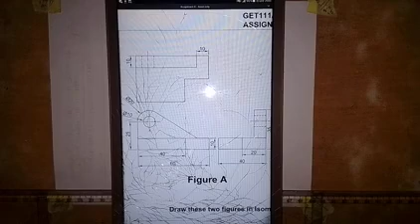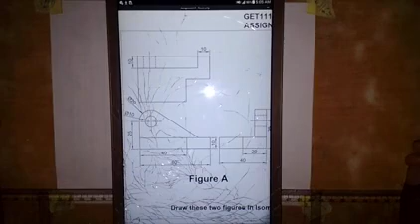We are going to produce its isometric view, as these views are orthographic views given in third angle projection. This is the plan or top view, this is the front elevation, and this is the right end elevation.

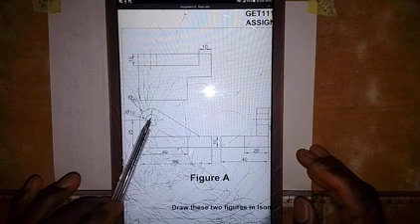Based on what we have here, the distance from here to here is 60 millimeters, from here to here is 40 millimeters, the thickness from here to here is 10, and the center distance of this circle from this base is 25. Diameter of the circle is 10, and diameter of this curve is 20.

With other things we have in the plan, on the end elevation we have distance from here to here to be 20, and distance from here to here is 20, which is also the same as distance from here to here. Then we have from here to here to be 10.

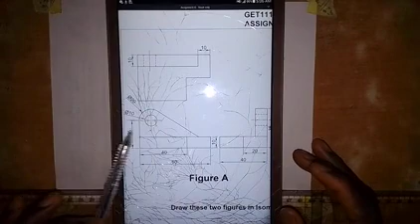As it is not indicated, the lowest point is not marked, but in my drawing I'm going to take this point as the lowest point, which is also this point here in the front elevation. We are going to use all these dimensions to produce the isometric view of this object, and the total height is 35 as shown in the right end elevation.

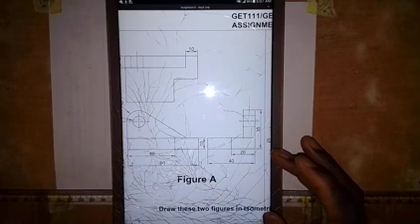Let's start and see how the work goes. The first thing we are going to do is make a short horizontal line here at this point, and then with the 30-degree set square, I will draw a line in this direction.

Sorry, I need to come up a little bit here, so I can't use that line. But looking at the dimensions we have, I'll show you how I'm going to do it. So we put the set square here, and we draw a line in this direction.

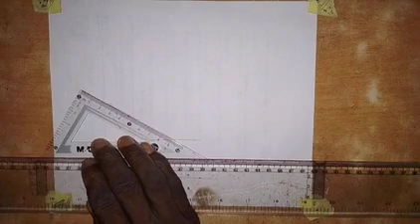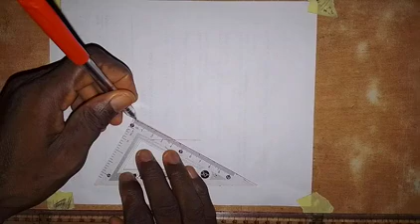I'm going to take a measurement of 40 millimeters on this line. Because I've said this point where we have that 40 millimeters, I'm going to take it as the lowest point. So at this point now I'm going to draw a vertical line.

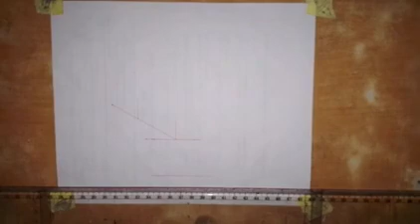I will draw a vertical line at this point here, and coming to this point also I will draw a vertical line here. Then the next thing is I'm going to draw a line at this point at angle 30 degrees to the horizontal, so it goes in this direction.

The measurement I'm expected to take in this direction is 20 millimeters. So at this point I will take 20 millimeters from this point to this side, so this is 20, and at this point also I'm going to draw a vertical line.

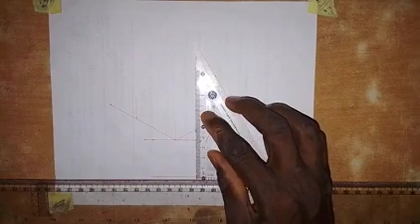So let's draw this line. Then I'm going to take a measurement of 10 millimeters on this line, 10 millimeters from this point up, so this is 10 as the thickness of the base part.

From this point I'm going to draw a line in this direction, then draw another line in this direction to touch this line, so we have this. Then from this point I'll draw a line in this direction, and from this point also I'm going to draw a line in this direction, so it goes like this.

From this point I'm going to take a measurement of 20 millimeters, so this is 20 millimeters here. At this point I'm going to draw a vertical line, so we have a vertical line here.

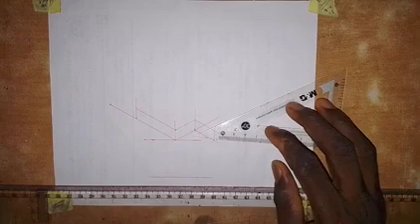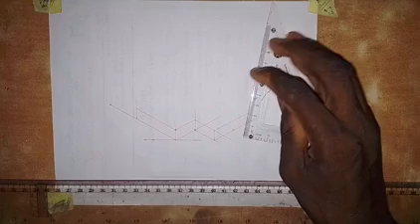Then from this point I'm going to draw a line in this direction like this, and from this point also I will draw a line in this direction. On this line I will take a measurement of 20 millimeters to this side, then from this point I will draw a vertical line here.

Then we come to this end here, so we are going to draw a line in this direction. The line is not really shown on this part, so we don't have to take the measurement.

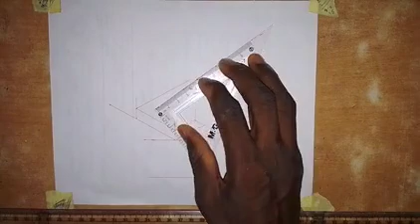So what I need to do is to transfer from this point to this end here. So from this point we take it to this end. So that is what we have as the base.

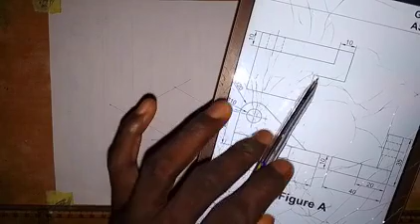Now based on what we have here, let me bring the diagram so that we can look at it together. Look at what we have here now. So what I've produced is this base part, and that is what we see here. So the next thing that we are going to do is that we have this part in the front elevation, placed here on this rectangle.

So we are going to form this part, and you are going to see how I am going to form it.

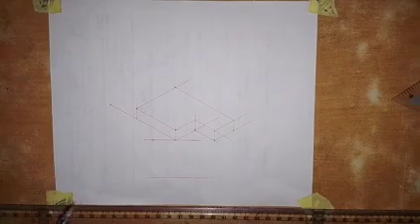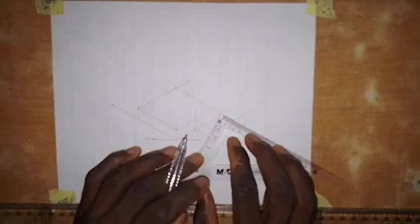So what I'm going to do right now is that the thickness of this part here is 10 millimeters as we have it here, and then we have to take a measurement of 10 millimeters from this point to this point. So from this end now, I will take 10 millimeters from this point to this point here.

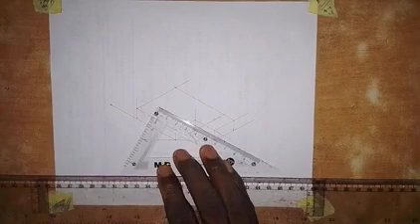Then I'm going to draw a line at this point. Then I will take a measurement of 10 millimeters here from this point, 10 millimeters in here. Then I will draw a line in this direction, touch this line. So that's what we have there.

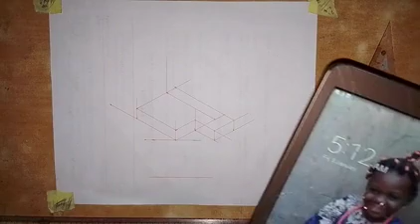So then at this point now, I'm going to erect a vertical line at this point here. So the radius of this curve here, or the diameter, is 20. So we are going to make a square on this face, whose length will be 20 millimeters.

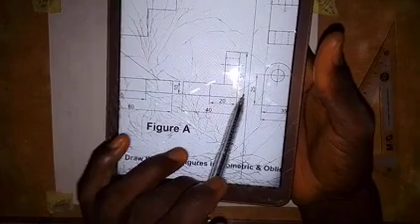But before that, the total height from this point here to this point is 35 millimeters, and already we have taken 10 from here to here, so that will remain 25. So we are going to take a measurement of 25 millimeters on this line, 25 millimeters from this point, up here.

Alright, so with this one, we are going to take a measurement of 20 millimeters here on this line. So this is 20 millimeters. So at this point, we are going to draw a vertical line at this point here.

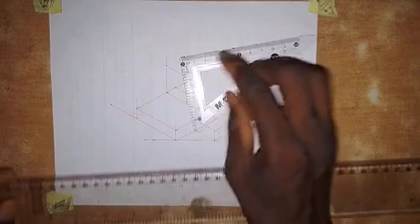And then this 25, we are going to transfer it onto this line here, like this. And then we are going to take a measurement of 20 millimeters down so that we can form the isometric square on this face.

So I will transfer this to this end here. So like this, we transfer it here.

Then the next thing I'm going to do is to locate the midpoint here, that is 10, 10 to both sides. So this is 10.

So I want to construct an isometric square on this face, and here also I will take 10 millimeters from either of the 2 points.

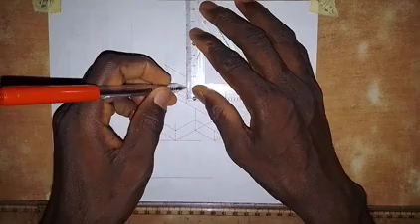At this point here, I'm going to draw a vertical line. So we draw a vertical line here. And also at this point, I'm going to draw a line at angle 30 degrees to the horizontal.

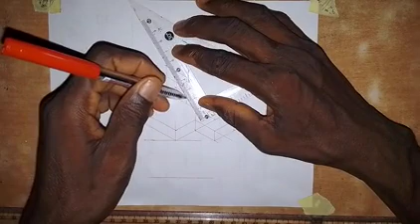So now with this, we are going to join this together. So we are constructing an isometric curve here, not a circle, though we are still going to draw a circle. Because it's very small, we are producing the arc here at this point.

So before that, I'm going to draw a line from this point and join it together with this point. So we join these 2 points together with a straight line like this. Alright, so that is all that I need on that part.

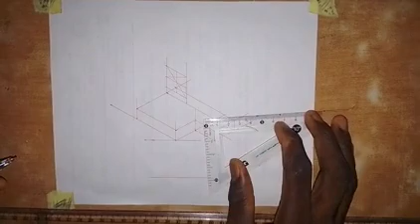So I'm going to take my compass, but I don't think the compass can work for this. So what I will just do, I will make use of a French curve to solve this problem. So I'm selecting the French curve that I will use.

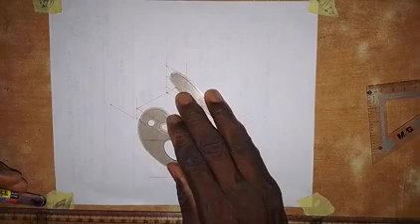Let me check this one. So we are joining this point here and this point together, and it goes like this.

So set the French curve very well, then we join these 2 points together like this.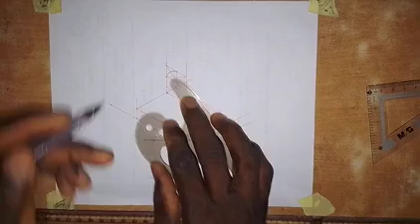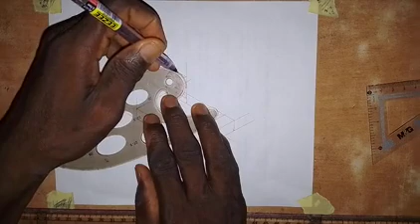And then for this part here, we are joining this point and this point together with the French curve again, so we set like this, and then we draw the curve like this. Alright, so we have this curve now on this face.

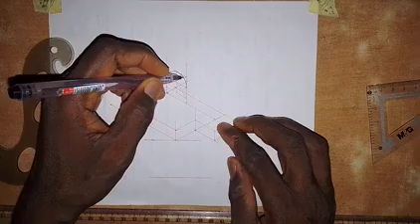So that is what we have there. I may still need to erase some part of this. I think I should have stopped it here on this line, but let's finish the work.

I will remove it. So then the next thing that we are going to do is to create an isometric circle on this face.

Okay, I want us to see it very well. So let's create an isometric circle on this face. The diameter is 10, so the radius is 5.

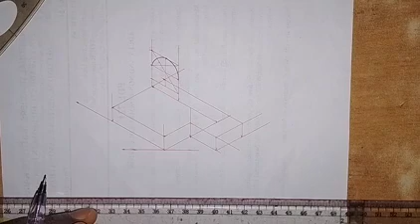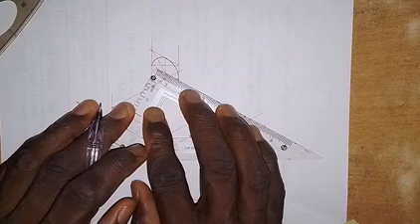We are going to take a measurement of 5 millimeters up and 5 millimeters down. So here we have the 5 millimeters, and down here we have 5 millimeters. On this side also we take 5 millimeters to the left side and 5 millimeters to the right side.

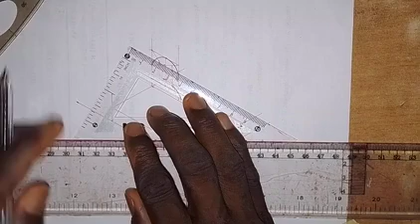Then we create the square on this face so that we can draw that isometric circle. We draw like this and draw a vertical line here. Then from this point, we draw a line in this direction, and we also draw a line from this point in this direction.

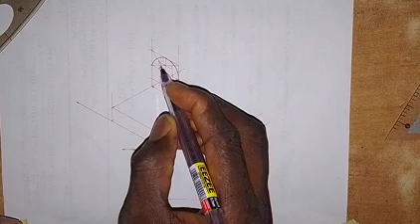You can see that this circle will be very small, so what I do in this case is use my hand to draw. I'm going to connect this point together with this, free-handed, and then connect this point together with this.

So we have it like this. Then these 2 points I will connect together, so it goes like this. When the circle is small, what I do is use my hand to join them. So then also this one, I will go this way, join this together like this. You can see the circle is shown here.

Alright, just try to make it bolder. That is how the circle will look there.

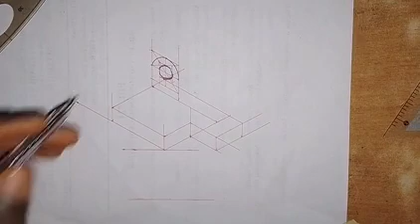So then the next thing we are going to do, we have the same thing on this side. We have this curve also on this side. So let's see how we can produce that.

What I will do is with the 30-degree set square, produce this point to this side, then coming to this point, take it to this side, and from this point, take this to this side here, and then from this point, take a line to this side, and coming to this point, produce the line to this side.

Then I will now take 10 millimeters from this point, and then from this point here, I will take 10 millimeters. And coming up here, I will take 10 millimeters from this point, and then here I will take 10 millimeters. So this is 10 millimeters.

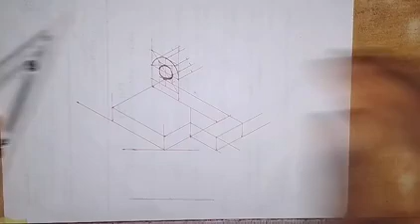So we have this. Alright, so this point we are going to join them together. I'm going to use the French curve to join this point together. Let's see if this will help us bring it out.

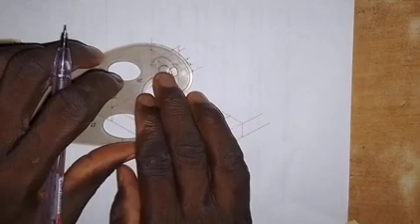Alright, so we set along this part, and then we are going to draw like this. So I still need to remove part of this curve.

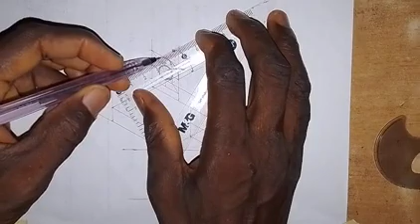And then for this part, so we join this together, and this line here now, this particular line will now be a thick line like this. Alright, so we are almost done.

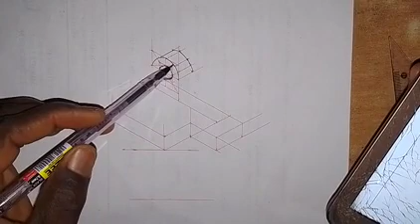So the next thing we are going to do is draw. Let me show you the line we want to draw now to finalize this work. So this line here, we have to draw it. We are joining to this point, producing it from this part, join to this point, and produce from this part, join to this point. Let's see how it goes.

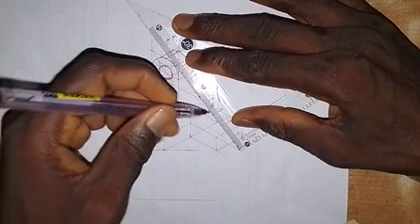So what I'm going to do is, from this particular point here, I'm going to draw a line. I will draw a line from here, so it goes like this. Then I will come to this point also, and draw a line from here to here.

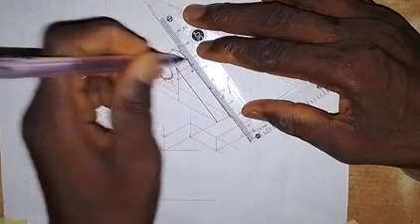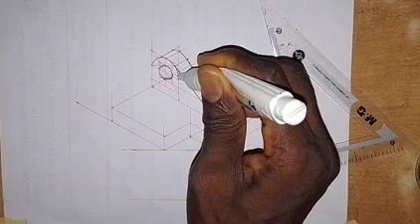Alright, even though I need to rub it off, I'm not using a pencil, I use Tipp-Ex to remove it. Okay, so I've been able to remove that, and also for this one, so we have this.

So the next thing we are going to do is to make this line here a thick line. I'm going to pause the video and bring out the thickness of the visible outlines and edges. Alright, this is the isometric view of the objects.

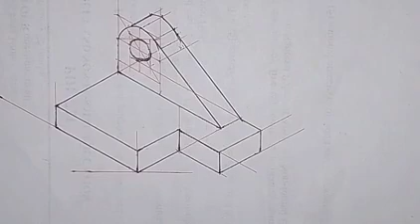As simple as I've done it here, all you have to do is practice. When you practice it, you become a master at it. Thank you, keep on practicing, and God bless you.